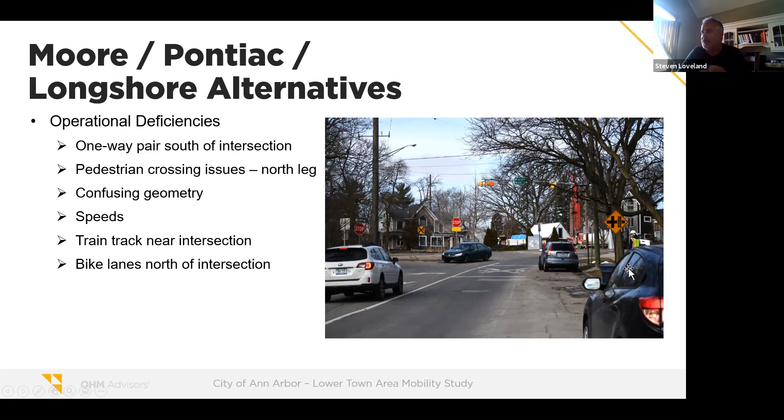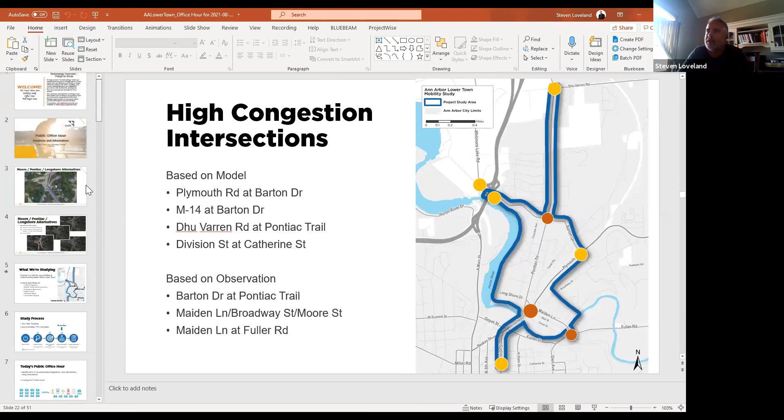So as of late, we have been talking about a new near-term solution at this intersection, and that's what we were going to focus today's discussion on. We are open to talk about anything in the Lower Town area today, but this was going to be something we wanted to share and just discuss and get the public's view on this. And then as a team, just discuss if we see any issues.

In this option, we take that and just keep it as one lane northbound through the intersection. And when you get up to make a decision if you're turning onto Longshore or you're heading north, we're proposing to put a yield condition in there.

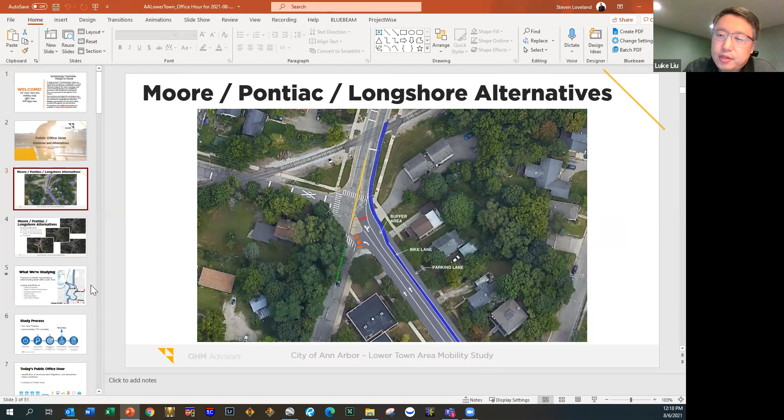Any other comments on this one? Yes, another feature, I guess, is the pavement markings. It's symbolized by the triangles on this slide here, those red triangles on the pavement.

So when they are installed, it's going to be a yield line, colored white, white pavement markings shaped as a triangle. It's a line of triangles extending from the island in the intersection all the way across the travel lane, the buffered area, and the bicycle lane.

So the idea is to have this yield line marking as well as extension of the double yellow along Pontiac Trail. Hopefully these two features will also mitigate the occurrence of turning the wrong way.

One thing I was wondering, and we hadn't talked about it, Luke, was in this buffer area, would you put the triangles across there or have hatching? Do you hatch your buffers?

The idea is to have the buffer and also have the yield line covering both the travel lane and the bicycle lane. In the buffer area, it may stay as hatching.

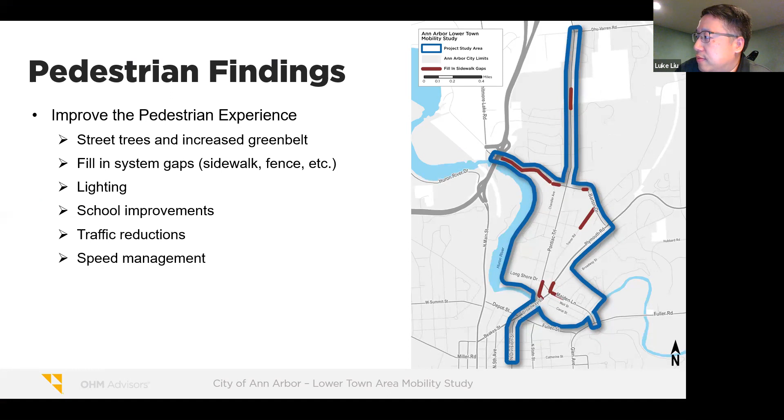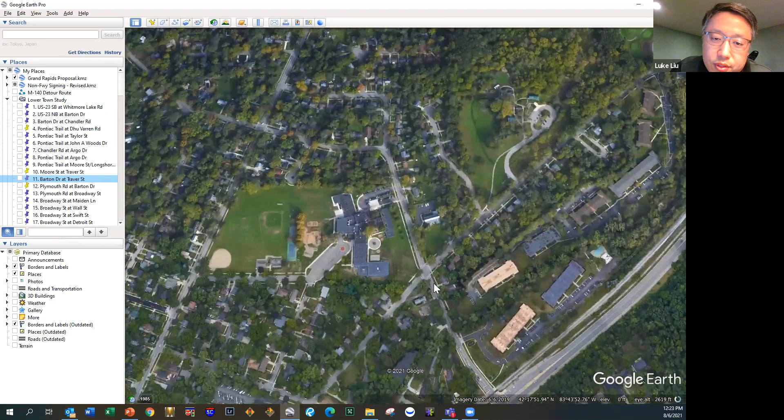Okay, Steve, this was part of the discussion two weeks ago during office hour number one. During that, we basically showed in Google Earth the potential options for that section of Traver on the inbound side of Barton, the north side, where there's a slope, so it's almost not feasible to add sidewalk using the typical configuration. So what he presented was the option of running a sidewalk in the street with a defined pedestrian area as part of the pavement.

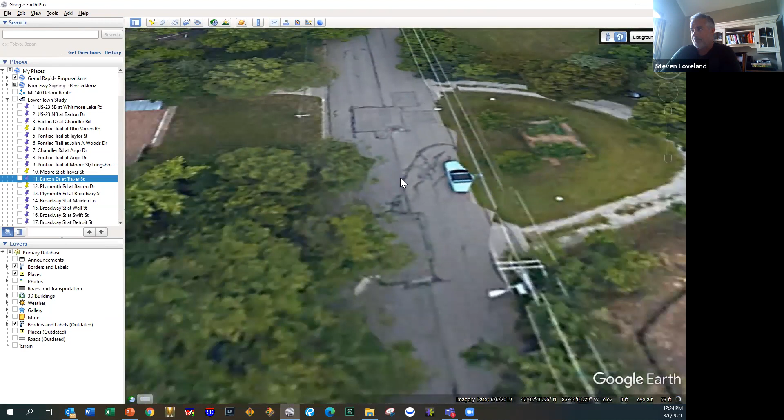Yes, and obviously that's going to impact parking. We have talked about this in the past. Internally, this road is wide, it does allow parking on both sides. We talked about narrowing the roadway pavement, potentially just allowing parking on one side, then using part of the road to either put in bike lanes, or if you wanted to separate out the bike lane and potentially put a walkway. We thought there was enough room that you had options there.

How wide? It's roughly 31 feet across, with an 8-foot parking lane on one side and 11 to 12-foot lanes. It leaves a little bit of space. Where was... is it the north side? That was the biggest. Well, you've got it on both sides.

But we did see people walking down the streets when we were out doing our field reviews. And from what we've seen with parking on street, I think you could potentially just have parking along one side. But this is an area we identified as needing pathway or sidewalks.

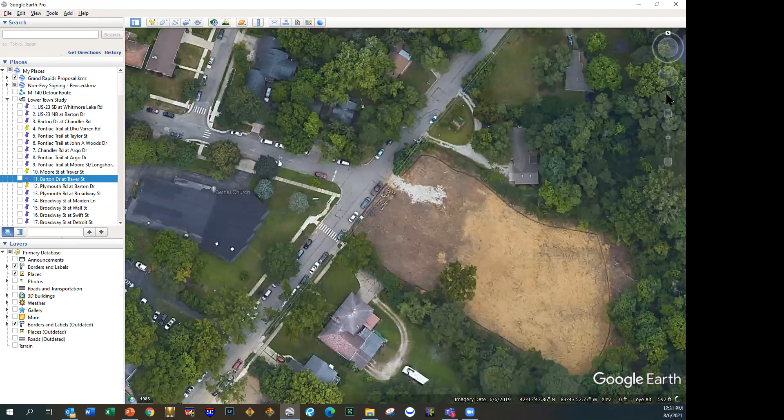During the last office hour, there was some discussion about the crosswalks for crossing Traver near John A. Woods. The concern was about travel speed on Traver and the visibility of pedestrians in the crosswalk. So because of the vertical curvature there, the location of the existing crosswalk, where Steve is showing on the screen, sometimes there are visibility concerns. So users, according to the feedback, tend to cross further west of the crosswalk.

So the suggestion was to seek mitigations of that issue. Lester, does this sound like a concern you would agree with as well? Yeah, I don't use that crosswalk up the street very much. I'm more concerned, and I think the biggest concern, are students walking to school along Barton and having to cross Traver Road, with Traver Road being used as a parking lot for the school for drop-off. And that's really dangerous. Even with sidewalks on Barton, it's dangerous for students crossing Traver to reach the school.

Yeah, right there. This left and right side here is a parking lot on both sides, with parents late for work coming in there. There's cars double parked, and then cars trying to find a place to park. There's a lot of traffic on Barton Road, which complicates things. So students just crossing that crosswalk is a real problem.

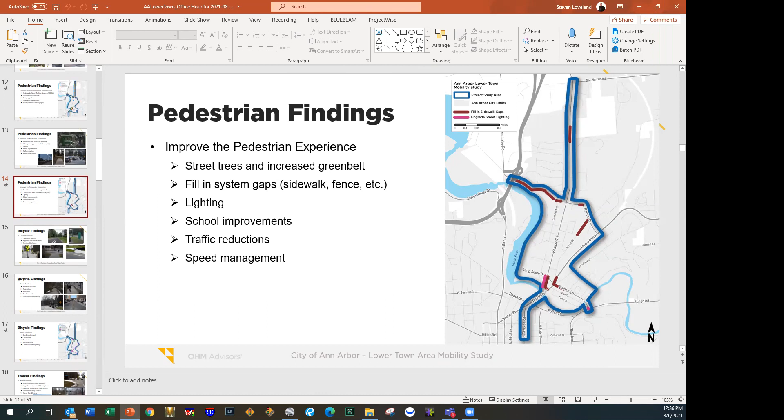Hey, thank you. Sorry, I joined late, so I was kind of listening in. I'm interested in the area near North Division, where it merges into Broadway and the bridge there, and some of the comments in the survey that went out a while ago about that. That whole area just needs work, but I'm not totally sure what the solutions are.

I think you guys talked a lot about that in the last office hour. Not a whole lot, no. We only toward the end of it, we were moving past the Broadway bridge toward the downtown side. So it was more of the last 5 to 10 minute discussion, so we definitely go into this in greater detail.

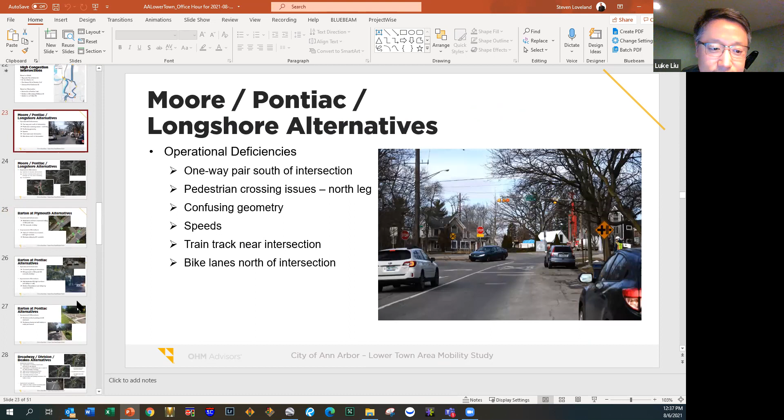Okay. Yeah, we've spent a lot of time looking at this as well, and we more recently have updated and looked at different alternatives in this area.

We even have more updated exhibits than what's shown here. But what we're looking to do, and because you're familiar with the area, this is I think the highest crash area in the Lower Town Study area. You have high speeds coming down, heading northbound on Division. There's a lot of streets coming in together. We have ped crossings through here.

I don't know if we have it in here or not, but we had put together some new exhibits that showed - since I don't have it here, I'll try to just walk through it. But as you're coming north on Division, what we were looking to do is, instead of, let me go to...

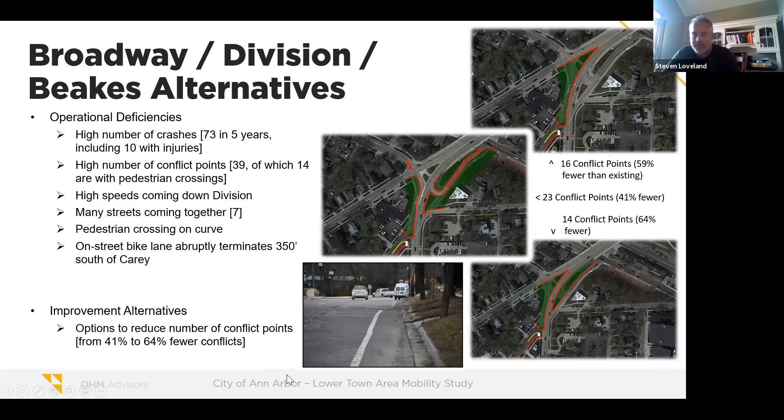You can see this on Google Earth. So currently, as you're coming up Division, you have parking on the left side, then you have 2 through lanes and a bike lane. So as we just talked about, the bike lane ends, and then the parking on the left side ends, and then you form a left turn lane, which takes you onto - is that Detroit? Yep, yeah, Detroit.

So what we've been looking at, as you get further into the intersection, there's a lot of different options of what you could do, but what we were looking at is something that you could carry through all the different alternatives: carry this bike lane, keep it going all the way up to near the bridge. Then take this parking lane and extend it almost all the way up to Detroit, making 2 lanes on Division, carrying that up through the intersection with Detroit.

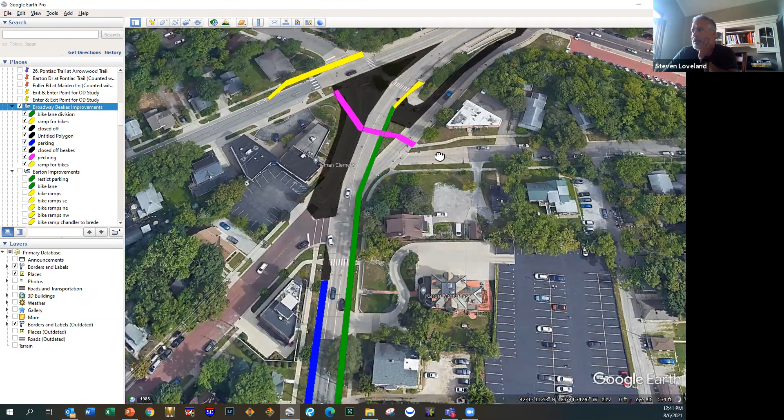We haven't fully figured out how to do all these improvements, but the bike lane, as you get up closer, you would need some sort of transition out of the bike lane up onto the pathway that goes across the bridge. The issue with that, though, is you're now bringing high-speed bikes into the area where you're going to have people walking. This option here showed closing the ramp.

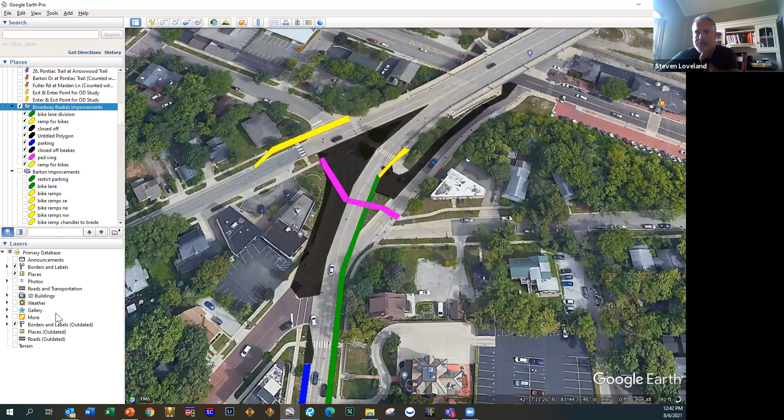Ah, there we go. Sorry. Thank you. Yeah, I know right where you mean, because of the grade of the hill there and everything.

Okay, so the bike lane is the green, and then as you come up around the curve, trying to get them across the bridge. I don't know that you want to keep most bikers in the traveled lane going across that bridge, so it was trying to figure out a way to transition from a bike lane onto the path at the bridge, without having the bikes get off at too high speed and then interacting with people walking in the area.

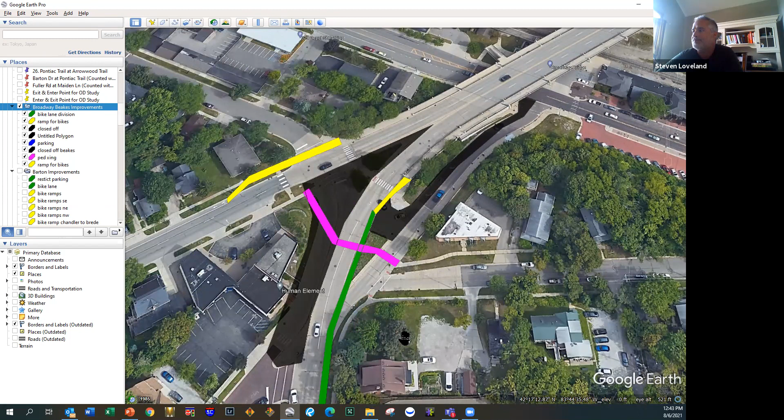Is the overall plan still to keep the bridge 4 lanes, 2 in each direction? Yes, so far we're not really talking about any lane reduction on the bridge. The discussions are focusing on the intersection area.

Got it. Okay, well, I can always dream. I would love for that to just be 2 lanes with a buffered bike lane, but I understand that's not on the table currently.

But the reason I bring that up is because I'm fairly comfortable as a vehicular cyclist, and I'll make a decision in the moment whether I want to stay on the road, or if there's an option like here where it's friendlier and more scenic to be over on the pedestrian sides of the bridge, which are physically separated from road traffic. But then sometimes, if there's not a lot of traffic on the road, I'm perfectly fine staying in the right lane, making sure it's visible and flowing with traffic. So I'm kind of torn about that.

I see what you mean too about merging the bike lane traffic in with the sidewalk also brings its own challenges, if I was following you right. Yep.

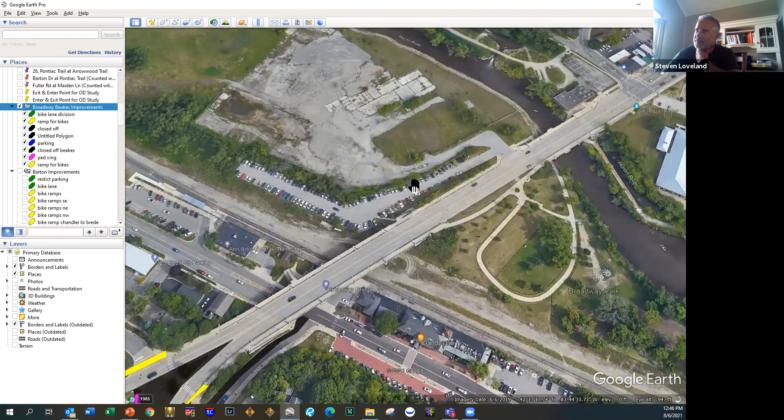And there's also the new development planned for this area. Right, yeah, that's exciting, right? But then that will also bring some more activity there.

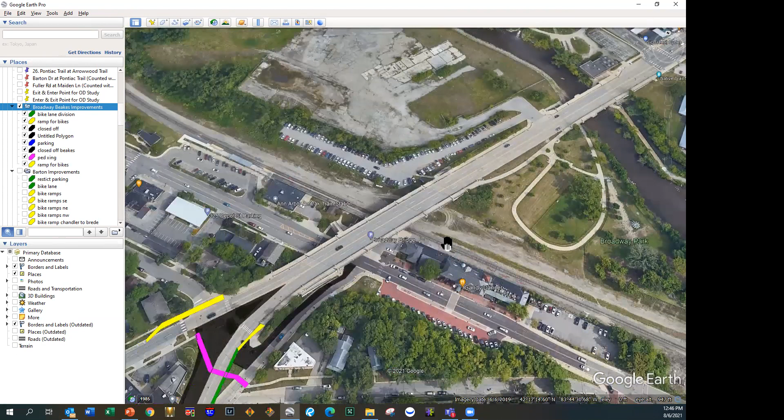I guess I kind of like what you're showing there with the yellow, that's kind of the bike lane merging in with the sidewalk. I think that definitely makes sense to me, because that's the challenge of the bike lanes especially, you know, in the earth view it just ends, end of division, and then you're kind of left, some cyclists can fend for themselves in traffic. When there's a lot of traffic, especially during rush hours, that becomes less attractive.

So something like that you've got there feels, given that space and given what you're saying that the bridge is going to stay 4 lanes, like a good way to go. I guess the main thing is just keeping the continuity of the route, that it doesn't disappear and you're kind of fending for yourself. Just more that the route was on division, it's coming up around this curve, up the bridge, and then the route moves onto the wide sidewalk there on the bridge, and then continues on.

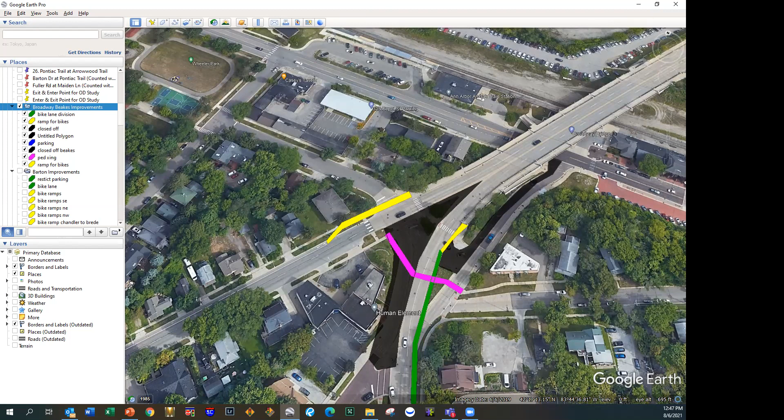If I may ask a question: the concern about the bike lane on northbound division, providing a ramp connection to the shared path over the bridge, about the potential conflict between the bicyclists and the pedestrians, that's something raised by staff here. Is that a concern you could help us validate, or do you think that should not be a concern?

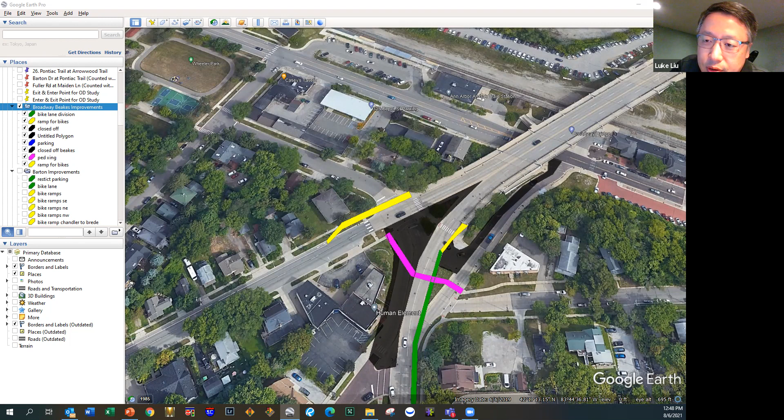That's a great question. I can think of when I've gone through there, both in a vehicle and on a bike, and occasionally on foot, following the pink line there. I do that on occasion, not as frequently. I always feel like on a bike it's easier for me, if I see somebody crossing the street, unlike a lot of drivers, I can deal with that situation better. I can say, okay, they're crossing, I'm gonna have to slow down, and I can't just assume I can blow through here, even if I'm in the bike lane.

So when I've gone through there and people have been crossing, I felt like there's enough room for us to negotiate and for everybody to get through. That said, I do feel there is more of a conflict between motor vehicle traffic and people trying to make that journey on the pink line. If you're on foot, it feels like even with the accommodations that are there, and the signs dividing the lanes, it's pretty intimidating — like you're running the gauntlet to make that path. So I'm less concerned about the bike-pedestrian conflicts, because I feel like those can be handled pretty well. But the vehicle-pedestrian conflict is really the concern for me.

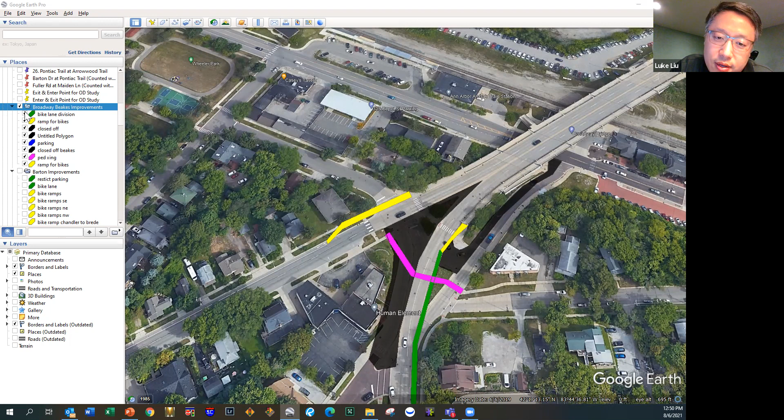Yeah, that's much appreciated. We did receive a set of very clear recommendations from a group of residents, including this area. One item in that set of suggestions was not very clear, so I'm going to follow up with them, but I still want to get some feedback from you. That's about non-motorized crossing facilities at this intersection. There's some concern that the existing crosswalks don't provide the best route for connections between the two sides of Broadway and Beakes and Division. So with that pink highlighted route, what is the more desired connection route in this area?

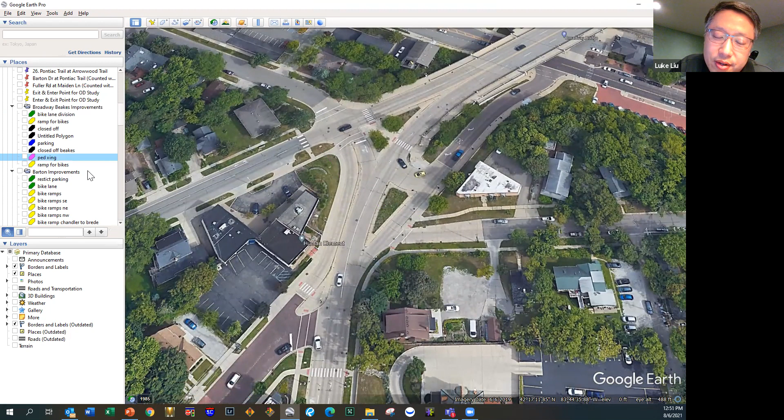Yeah, that's a great question, and I agree. I remember when the crossings went in, and there'd been some work there around that intersection. I'm trying to remember when that was — I remember thinking, oh good, there's more crossing options designated. I think some of it's the nature of that intersection, and some of it's just bad behavior that could be handled through traffic calming. People treat Division as the northbound expressway, taking northbound Division to eastbound Plymouth. I think there's bad behavior because it's a little overbuilt, and it's built like a freeway in a lot of people's minds. Same thing southbound, with the split off to Beakes.

So some of that, I think traffic calming in all directions would help. The environment shouldn't be hinting to drivers that you can go 55 here — this is a throughway. Instead it should feel like a dense urban area, where you're gonna have to slow down, watch out, and cross carefully. So that's just my general feelings on that intersection.

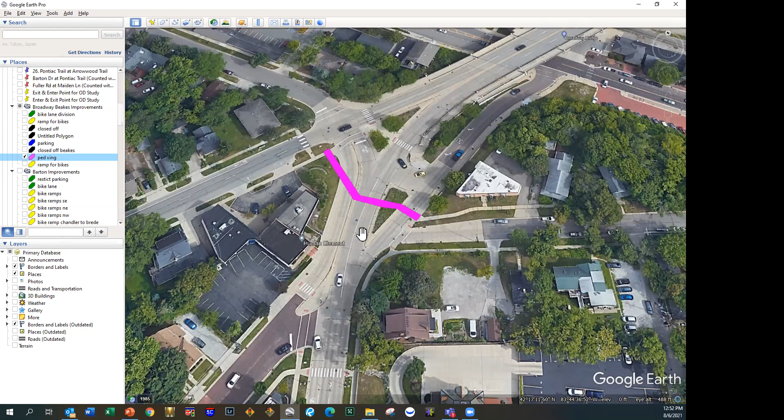Specifically to what you're saying, I do wonder about that crossing — there was pink on the other slide, and looking at it with the crosswalks, I wonder if moving them north or south would help. I'm trying to figure out where would reduce the amount of conflicts, but also not make it completely inconvenient for someone on foot who just wants to get across. That's always the challenge — it's easier for a motor vehicle engineer to say a pedestrian can just travel half a mile down the street to cross the boulevard. So I'm sensitive to not just moving it way out of the way, but also knowing this little vortex here is challenging.

Plus you've got the U-turn there from — sorry, I forget, what's the street that goes down? Mary, yep, exactly. That adds another element of traffic merging in from Mary, and then coming around that curve right where the crossing is. So I don't have any answers, but I do wonder if moving those crossing points further south and/or north, or both, would help. I'm also trying to think if there's any chance for a different type of underpass with the bridge there — trying to remember how much space there is.

Depot Street goes under there, a little bit further north. I'm trying to think with the grades there. I'm not a fan of just making a pedestrian overpass and forcing people to go up three flights of stairs and come down. Those are usually expensive and cost prohibitive too. But if there was a convenient way to do a flyover that was pedestrian friendly... Yeah, because you've got the grade there going above Mary.

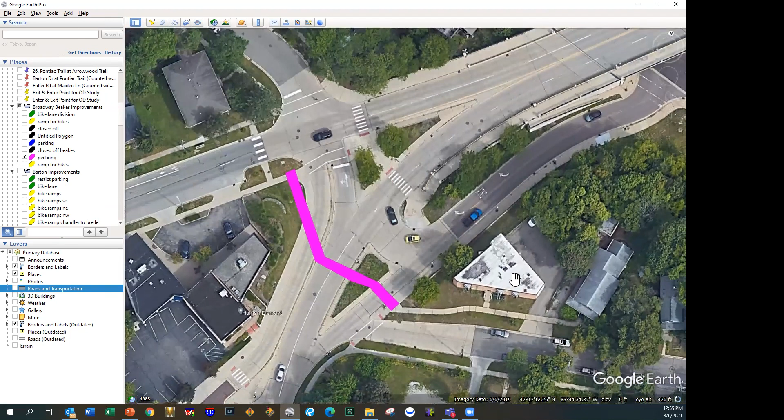Some of that was done near the Gandy Dancer and closer to the Amtrak station. Got you, yeah, thank you. That's super helpful.

Among the considered mitigation measures, one thing Steve hasn't mentioned is there's consideration about adding either RRFB, the flashing beacons, or Hawk, the type of signalized control, to protect the crossings. That may go hand in hand with some of the geometry changes he talked about.

I'm always a fan of those, I think they help and make it very clear. I know there are a lot of complaints about the other crossing points, and a lot of this is just an attitude that somebody in a vehicle doesn't have to stop unless there's a giant flashing red light yelling at them to stop. I don't think that's true, it shouldn't be true, but I understand some people behave that way. So when you can do RRFB or Hawk, that always helps — it makes it clear this is a crossing, you do have to stop.

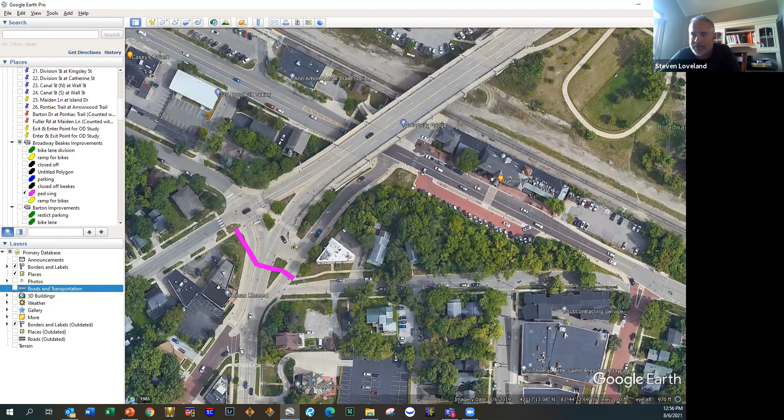Before this hour is up, is there any other thoughts you have, Chris, or any other areas? There are, but I know you're about to wrap, so I'll take a look at the other areas listed. I'm primarily a cyclist in these areas but I do also drive them, and overall I appreciated the surveys that went out and your continued engagement in the office hours. This is very helpful, I'm going to try to get some of my fellow cyclists to participate too. I know there aren't a lot of easy answers, but I appreciate that you guys are really looking at this with thought and care, so keep that up. It is appreciated.

Thank you. I'll mention we're going to do at least two more of these, one in two weeks and then two weeks after that, so there's more opportunity to weigh in. Steve, do we have a specific intersection or topic for the next one? No, we haven't decided. Anything's on the table — as you saw today, we started with one intersection and talked about whatever ideas people bring, we're open to hearing.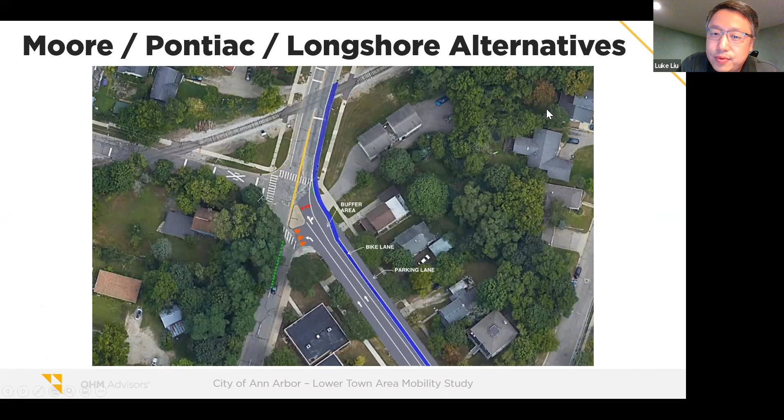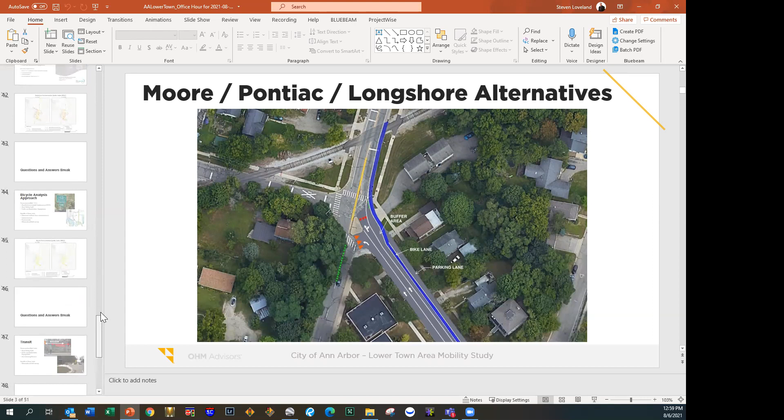Yeah, I think I caught most of that and it looks good to me. I didn't have as much of an opinion on that one, but I like the buffered bike lane area there, and the triangle sort of mitigating the confusion at that intersection. So that definitely looks good to me.

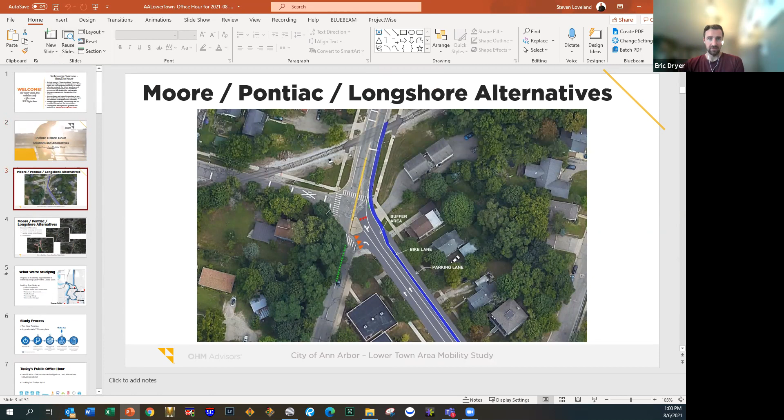Okay, great, well thank you very much, I appreciate it. Thanks for coming. Thank you, have a great weekend. Yeah, you do the same. I'll stop this and see you all at the next one. All right, thank you, okay, see you, thanks Eric.